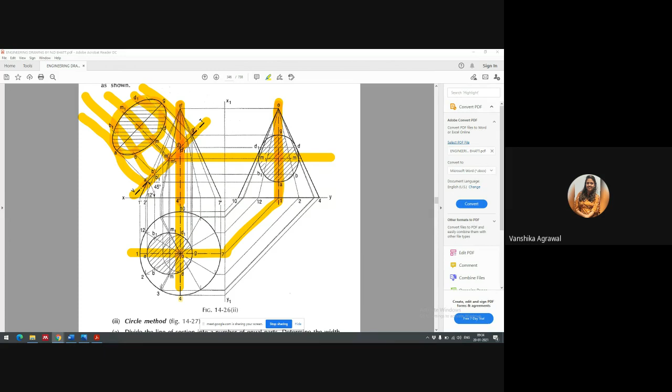एंड इन द सिमिलर वे O से B का जो डिस्टेंस है वो भी हमने मार्क कर लिया। आप देख रहे हैं, B1 यहां लिखा है और B यहां लिखा है, और same B यहां और B1 यहां लिखा है। तो इस O से B1 का जो डिस्टेंस है वो हमने निकाल लिया, and we put these cuts here।

इन द सिमिलर वे, M1, M2, ये M1 और M2 यहां लिखे हुए हैं, और ये points of M1 and M2 हैं। अब ये points same generator पे हैं। अब ये भी देखना होगा कि ये 3 वाली जो लाइन आ रही है, यही लाइन का जो जनरेटर है, ये जहां कट कर रहा है। समझ में आया ये पॉइंट, एंड इन द सिमिलर वे ये वाला जो जनरेटर है।

एंड देन दिस पॉइंट, जो पॉइंट G है उसके पहले ये वाले 2 पॉइंट्स हैं जो B1, B2 के पैरेलल पॉइंट्स हैं, विच आर D1 एंड D2, ये हमारे को यहां मिल गए। So that is how the true shape is what we get।

सर, इसमें जब हम लोग मेजर करके आर्क लगा रहे हैं तो वो मेरे मेजरमेंट्स जनरेटर्स पे नहीं कट कर रहे हैं। यस सर, यही प्रॉब्लम आ रही थी, मैं इसको ऐसे ही कर रहे थे पर वो जनरेटर्स पे कट ही नहीं कर रहे थे, तो मैंने सोचा हो सकता है मैं ही कुछ गलत कर रही हूँ।

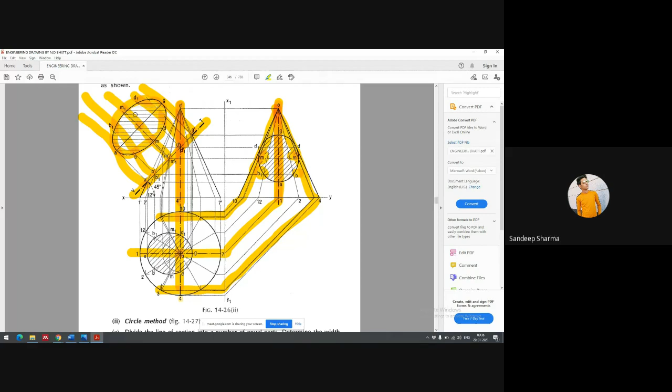बेटा एक बार, फिर मैं एक बार इसको खुद ड्राफ्ट करता हूँ एंड देन आई विल बी इन अ बेटर पोजीशन टू रिप्लाई टू योर क्वेरी।

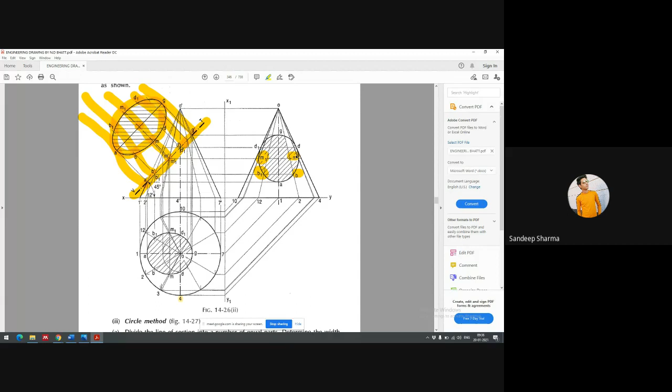समवन हु इज लिविंग क्लोज टू वैशाली नगर. यस सर. कहाँ रहता है भाई? सर पास में ही रहता हूँ, मतलब कमला नेहरू नगर साइड. अच्छा, कमला नेहरू नगर रहता है क्या? हाँ सर. चर्च के पास में? सर मी नो टू, सर. तो चर्च से थोड़ा सा दूर उससे. कमला नेहरू नगर कहाँ पे आया? सर ये बाईपास है ना, 200 फीट, हाँ. उससे थोड़ा सा आगे जाके वहां पे. अच्छा ठीक है. एनीवन एल्स? सर मी. कहाँ रहता है भाई? सर विवेक विहार मेट्रो स्टेशन के इधर. विवेक विहार मेट्रो स्टेशन, ठीक है. मैंने देखा था कोई अगर आसपास है तो अलग बात थी.

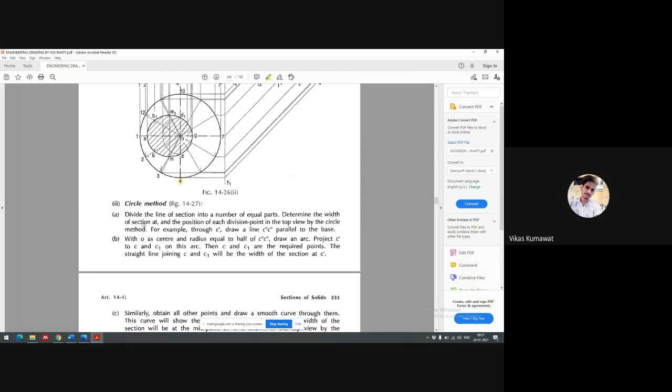चलो ठीक है, मैं अभी खुद ही ड्राफ्ट करता हूँ. I'll draft this and get back to you on this कि ये कैसे, क्या इसके अंदर इशू आ रहा है. I'll have to draft this on my board. So in the meanwhile, let's not put in time.

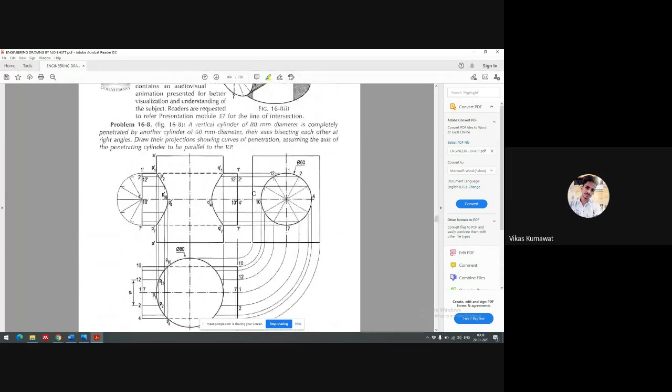So today what we will be doing, we will be learning intersection of solids. Now, intersection of solids is a little, I would say, a little tricky to understand.

Yeah, it is very easy. अगर एक बार समझ में आ गया ना तो it is a cakewalk. अगर नहीं समझ में आया ना तो वो तुम्हारे को दिक्कत करेगा. ठीक है. तो आई वुड सजेस्ट कि आप सब जने बहुत अटेंटिवली इसको देखिएगा.

सबसे पहले तो ये बताओ कि व्हाट डू यू अंडरस्टैंड बाय इंटरसेक्शन ऑफ सॉलिड. लोगों ने मतलब इंटरसेक्शन की बात करी हुई है.

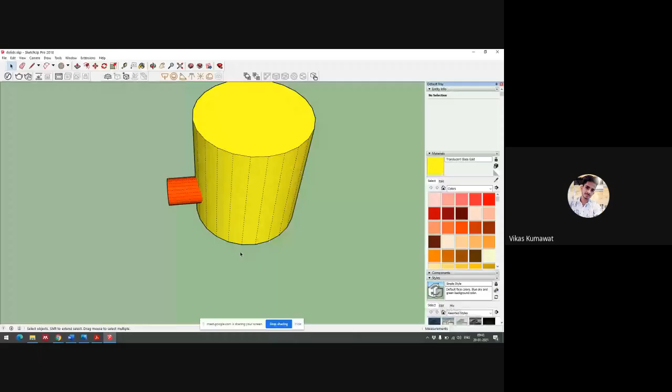Okay, so until now what we were looking at, everyone able to see my screen? Yes sir. Until now, what we were looking at were very simple geometries, geometrical figures, mainly working with surfaces and very basic shapes and forms.

So we break down almost every geometry that we have into very simpler forms, and those simpler forms, when they combine together, they make complicated buildings and complicated forms as we see them. What we see are these complicated forms or complicated buildings. No building, whichever way we look at it, whichever way we make it, can be made out of a single form.

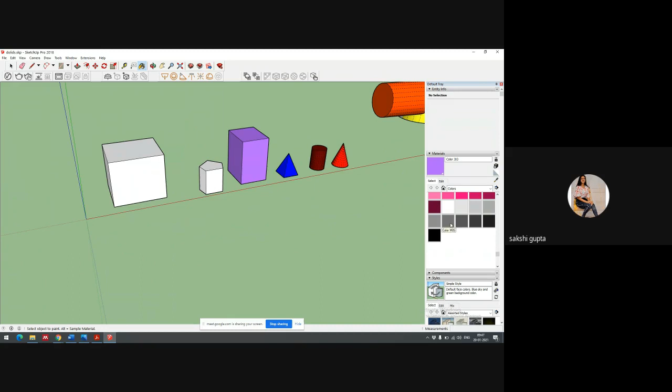So if I'm taking these shapes as is, it doesn't really correspond what shape this is, or what color this is, or what these objects are - some very basic coloring, so that when these forms intersect, you guys are able to differentiate among them.

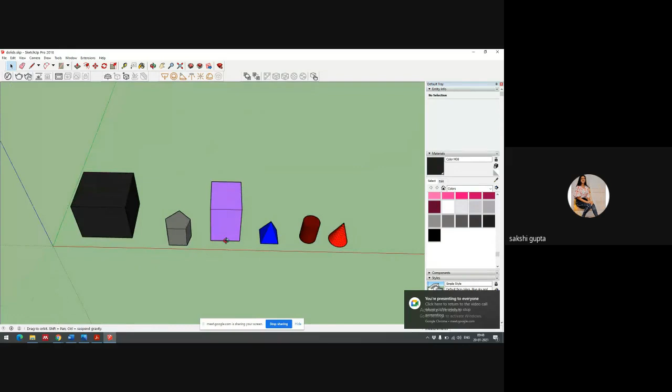Okay, so now these are some of the basic forms that we have, and now what we need to understand is ki agar koi bhi do forms intersect karein, making them equally sized, that jab hum intersect karein to woh aisa na lage ki ek doosre ke andar merge hi ho gaye.

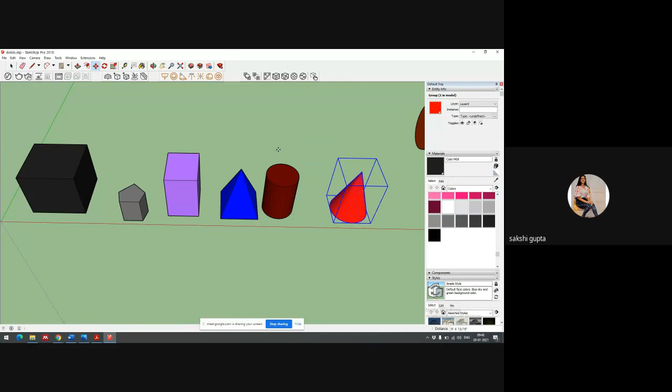Now let's say yeh ek cube hai, main usko copy karta hoon. Individually baat karenge - pehle humne baat ki ek cube and cube ki. Ab aisa to nahi hota na ki ek building jo hai woh ek single cube ki tarah hai, but it can be a combination of these two cubes. So let's say I just change the color of this one cube to purple, so that it is very contrasting and you are able to see it.

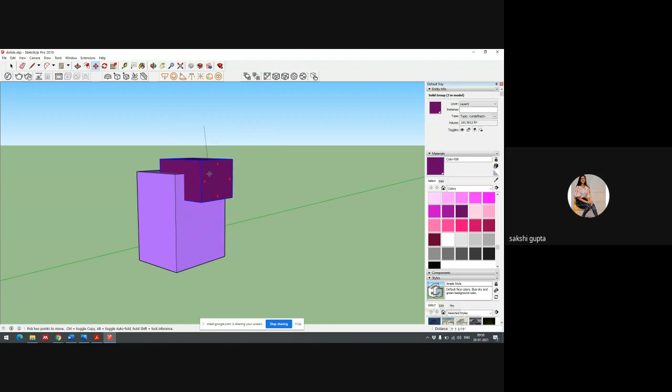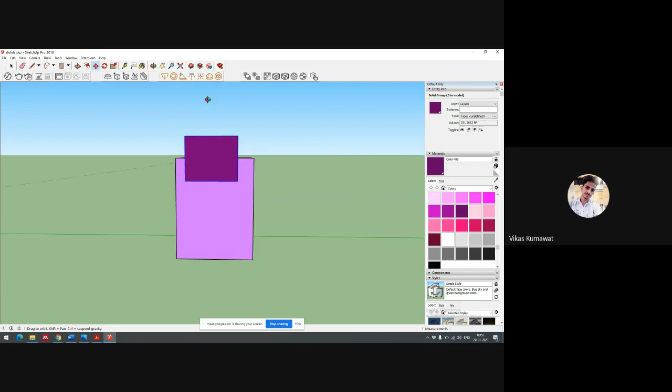Yes sir. Now when I am looking at it from the front, let's say I freezed this here. When I'm looking at it from the front, I do not see this entire cube - the dark purple colored cube - but I'm able to see this light cube when looking from the front. But when I'm looking from the right, what do I see? I do not see the main figure as complete, but I'm able to see the top figure which is complete. But what if I look at it in the plan - top view?

It is almost forming a T sort of a shape. And my rear view or back view is going to be the mirror of my front view. Agar front mein yeh object right mein nikal raha tha, to back mein yeh wala object left mein nikalega, right? And if I'm looking at it from the side, my side view is going to be only this. So that is what we have to be seeing.

The story starts to get complicated when I say that this object is tilted.

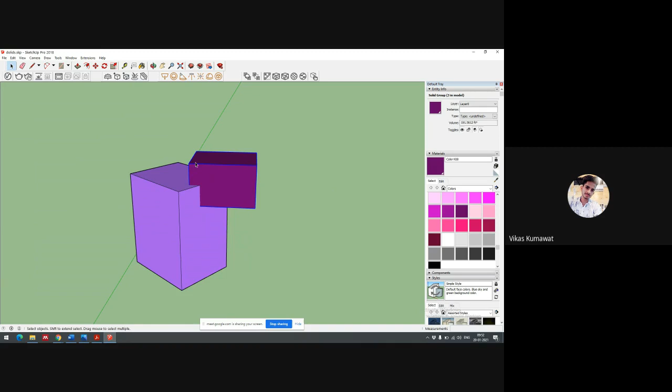Now let's say I tilt this to 45 degrees without tilting the dark one. Now the story starts to get a little complicated, because I've tilted this at 45 degrees and this is still lying where it is. Now you're seeing how these projections are being seen. So what is the change in plan that it is getting? It is a change in side elevation or the front elevation.

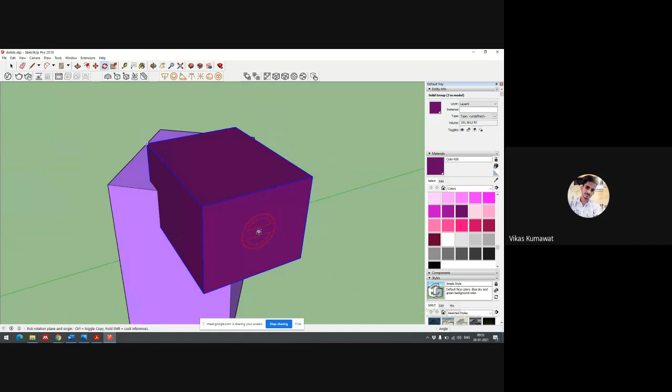Yes sir. Then the story gets more complicated if I somehow tilt this also at 45 degrees, and maybe I'll move it a little down.

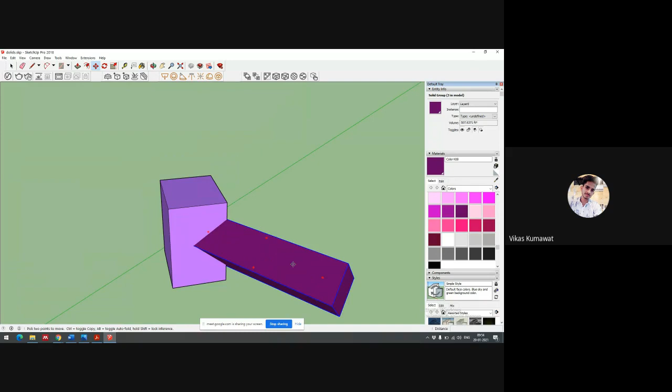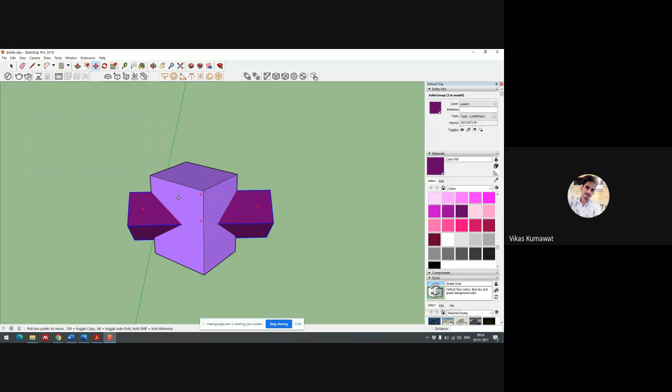And let's say I make its axis meet. It hasn't tilted to exact 45 degrees from me, I mean no, sorry, it's a rectangle, sorry, this rectangular shape has been formed, that's why it looks like this. But what I can additionally do is stretch it, like in old movies when a sword used to come out. So this is a sort of shape or form I'll get when it is an intersection of a cube and a cuboid, and a cuboid perpendicular to each other, so their axes are forming a plus. That is how this thing works.

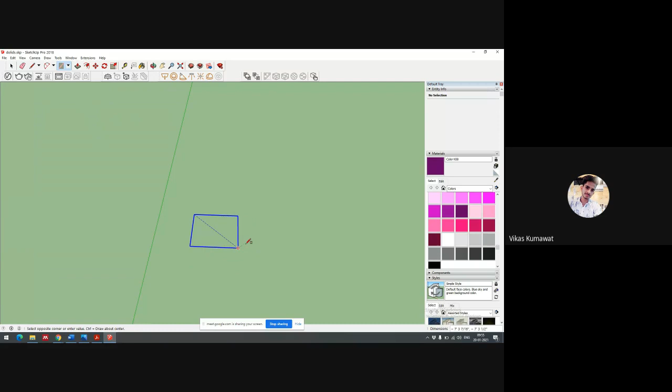Now I want all of you to be looking at your first question. The first question says it is a square prism of base side 50 mm. I'll draw this as we go ahead. So it is a square base prism of side 50 mm resting on its base in HP and completely penetrated by another square prism of base side 40 mm.

So this is a 50 mm one, let's say, axis is - no, axis is not given. The prism of base side 50 mm is resting on its base in HP and is completely penetrated by another prism of base side 40 mm such that the axes of both prisms intersect each other at right angle. The faces of both the prisms are equally inclined to VP.

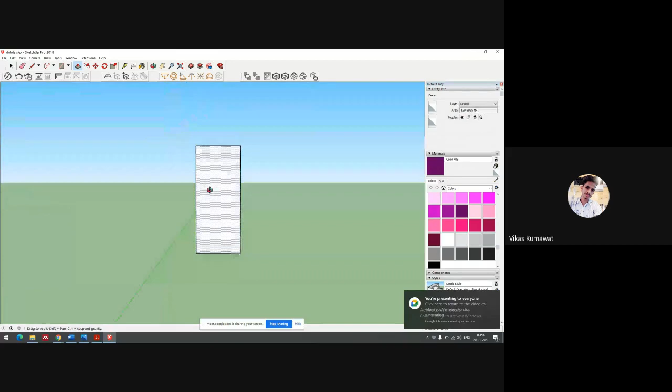Now when can faces be equally inclined to VP, for both? So my VP, my vertical plane, is at the back, and my horizontal plane is here. Vertical plane is at the back, my horizontal plane is in the plan.

Now if this has to be inclined, the first thing the question says is that there are two of this type. So let's say I make you a group - there are two of the same type. The second one is a little smaller than the first. Let's say I made it a little smaller than the first.

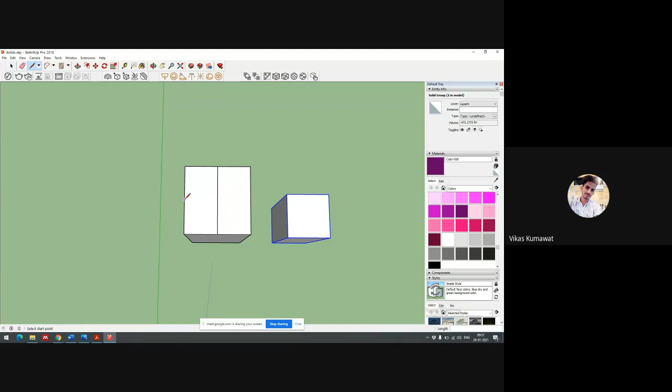Now it says both of them, both the axes. So the way to find the axis is that the centers of these form the axis. If I draw a line in the center of this, that is going to give me an axis. This is going to be an axis, and this is also going to be an axis, like a line which is in the center of it.

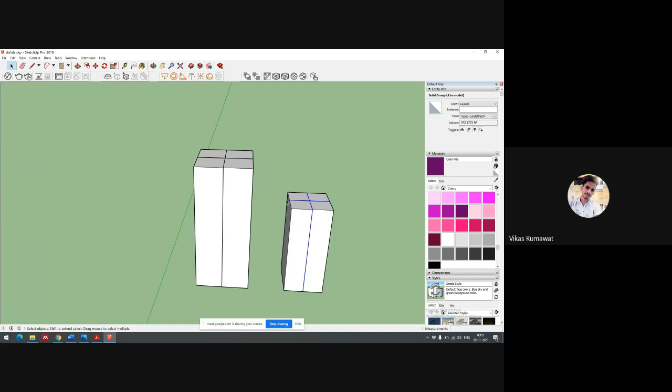Yes, now sir, the question reads - yes, the question reads that both axes are perpendicular to each other. So for making them perpendicular to each other, what I'll have to do is this. Now these will be perpendicular to each other, the axes. And the question also reads it is not just perpendicular.

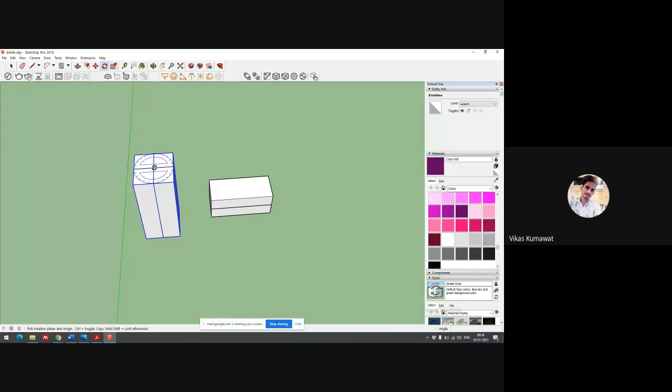45 degrees, and I will have to also tilt this at 45 degrees. So now both the axes are perpendicular to each other, and for both the objects, the surface is making an angle of 45 degrees, right?

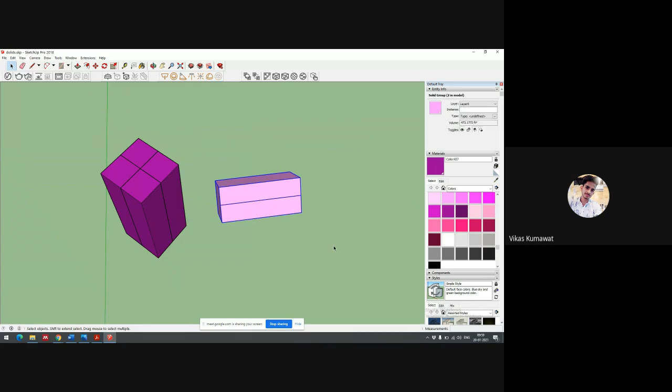So now the question also says it is completely penetrated by this. So if I put that inside of each other, that is something that I'll get. Something like this will happen if this goes into complete penetration. Yes sir.

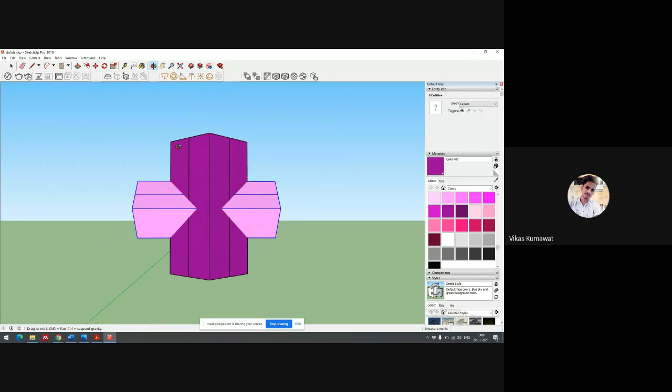Obviously these are generator lines, so you'll not be able to see these lines, they hold no value here. Once the generators are formed, these lines have no use. These lines will not come dark, they will come light.

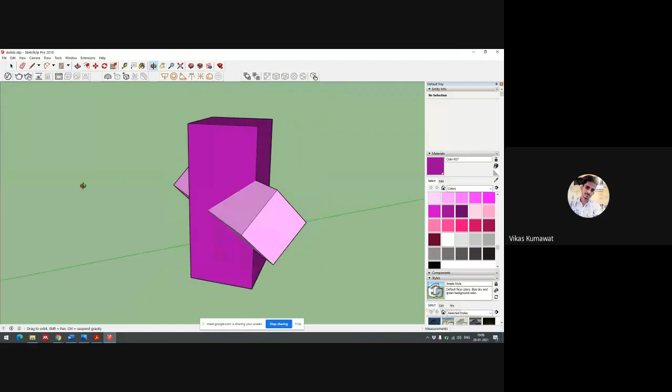Now when you are looking at the object, you can see, this is the side. That is exactly what we are getting. And this is the top.

This is what we are getting as top view. Does this question make sense to everyone? Yes, sir. Okay, so this is the question number 1 that you have to do.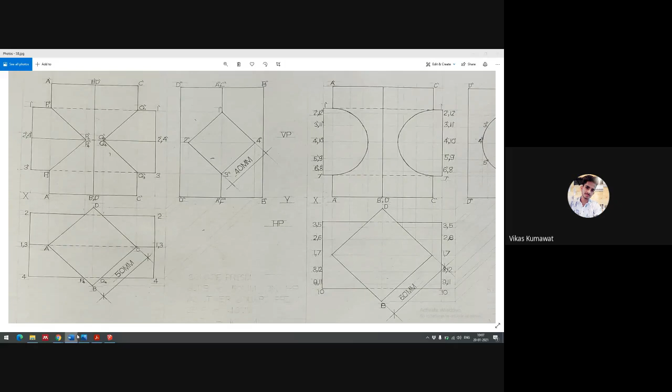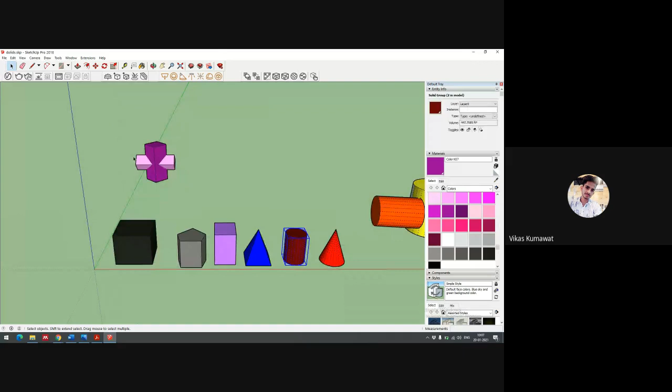Now the method for this question will become clear - how is the intersection working, how are we doing the intersection of any object. Now it is not only that the intersection can happen in terms of very clean and square surfaces. This can even happen for very complicated surfaces like a cylinder, like a sphere, like something else.

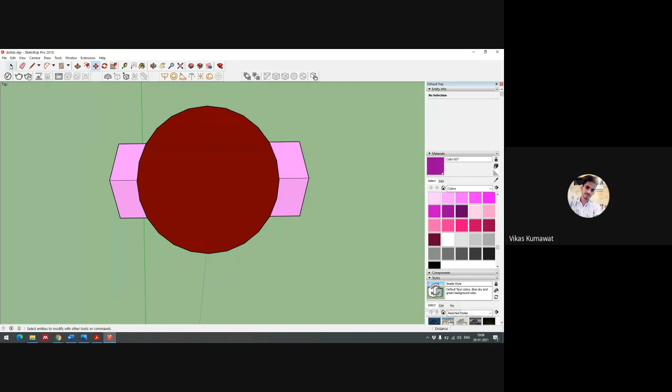So if I place a cylinder in place of this object, I keep that same object there. I just take this cylinder and try to put it there. If this is the cylinder, in its plan at the same position I have placed the cylinder, meaning I have not changed the position at all. What I've just done is instead of using the square prism, I have now used a cylinder.

So now you are able to see what changed. Earlier we were getting very rigid lines, and instead of rigid lines, now we are getting a curve. You are able to see this curve, you are able to appreciate the curve that we are getting.

And this curve we are not getting in side elevation - in side elevation only that line is visible. But when we look at the front view, we are getting this as a curve. I'll just scale this down a little so that you're able to appreciate the curve a little more.

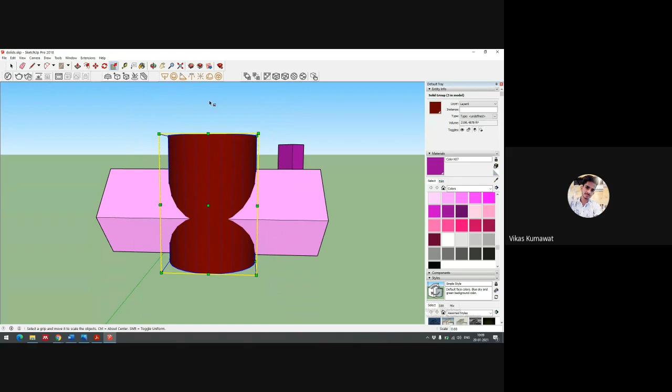Is the curve visible? You're able to see this curve, make this curve out. And even when you're looking at the plan, you are not able to see how this penetration happened. But only when you are looking at the front of this intersection, that is when you are able to appreciate how this curve is going in. And the points we get here have to be raised from the generator.

And let's just go ahead with question number 2. Then we'll understand this a little better in detail - how do we draw this and how do we go about this?

Okay, now question number 2. Square base prism of base side 60 mm is resting on its base in HP, which is horizontal plane, with a face inclined to 45 degrees to VP, which is vertical plane. So that means our older object - this object here - is placed almost in this same way, because it is making 45 degree angle with VP. The question says that it is making a 45 degree angle with VP, and that is how we have kept it.

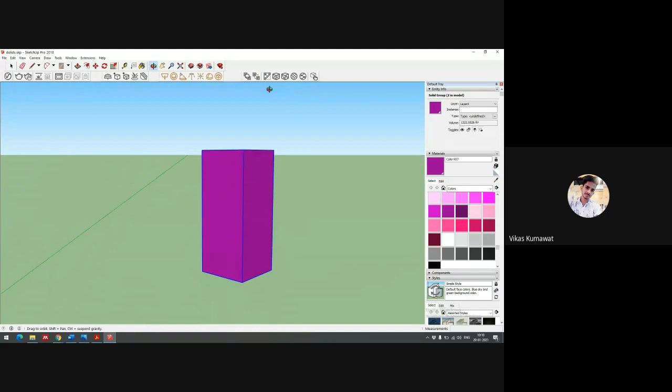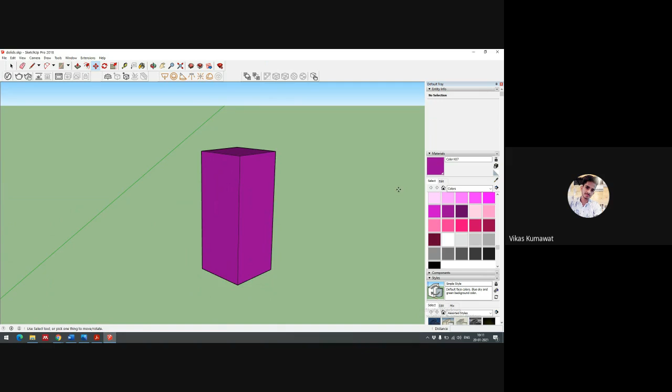Is completely penetrated by a horizontal cylinder of base diameter 60 mm, such that axis of prism and cylinder intersect each other at right angle. That means earlier what we were seeing, there a cylinder was bisected by a square prism.

Instead, what is happening is that this square prism is intersected by the cylinder. And how is that intersected? For this intersection, the question says that it is at 90 degree angle, because the axes are perpendicular to each other.

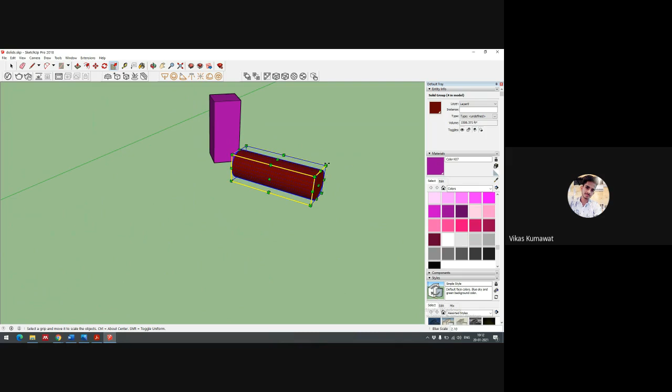So what I am doing is, because the axes are perpendicular to each other - let's say this, I increase the size of the cylinder a little and reduce this a little so that this is there. And now I take its generator and hold it here, and I keep it here. So both of their axes, meaning its central axis and this axis, both become in line.

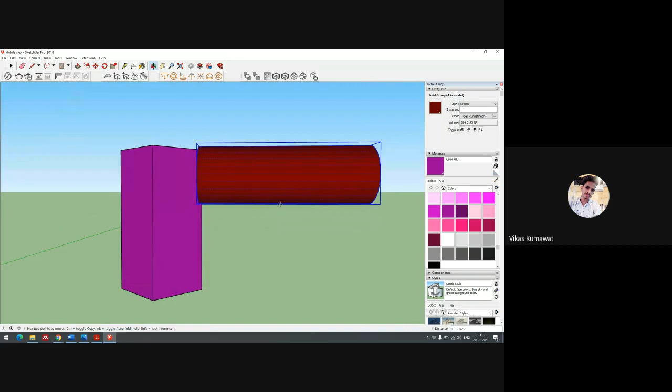They are both perpendicular to each other, but it says that they are meeting in the center - intersect each other at right angle. So what I'll have to do is move this object towards the center and penetrate this object.

So this is what I will see. When I'm looking at the side elevation, I will see a circle and the object making a rectangle with a line in center. This is what is going to be my front - rather, we'll come back to the front later. Then this is what is going to happen in my plan.

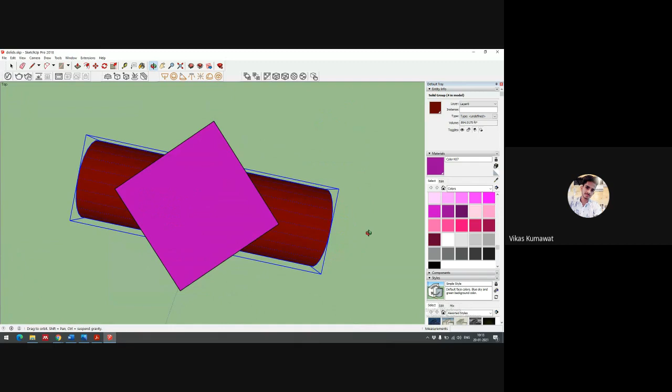And this is what I'm going to see when I see it in elevation. So now, with the help of my side elevation and my generators from the top elevation, I can connect these points. Can everyone see these dotted lines?

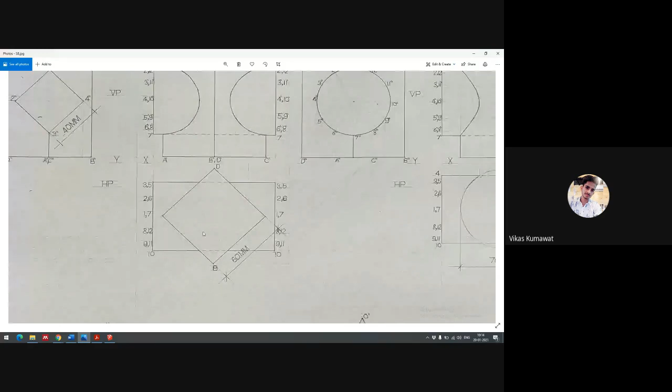These are basically the generators. And now when I see these generators, I'll come to that in a moment. Let me just show you how this is to be done. So now, you're seeing this. Is this one visible clearly to everyone?

Now in this, the square prism is kept on ground, which is A, B, C and D. You're only able to see the point D and B mentioned here, but this is A, B, C and D, right? And the projections that have been made are A dash, B, D, B dash, D dash, C and C dash. That is how this prism is made.

And when we look at the side elevation of this prism, it has point D taking its projection going up, D and D dash, point B taking its projection, B, B dash, and this point has it at A and C. So A dash, C, C dash.

That's what we have. Now the question says that the axes of this are perpendicular. So perpendicular axes can be drawn, one axis here and another axis here. So using this center of the axis, we draw a circle because in the side elevation we could see that circle like this, right? So that is what has been done.

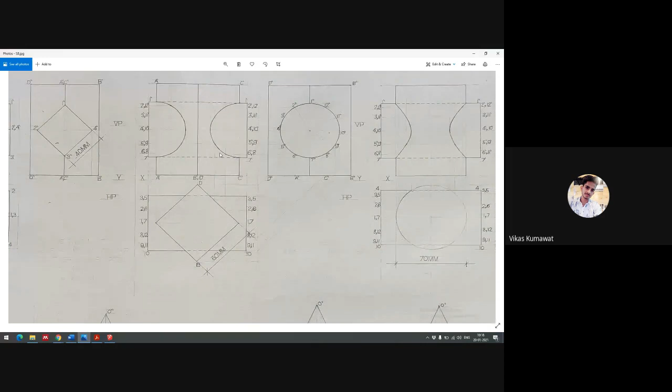Point 3.5, and similarly we'll take all the other points and we'll be able to draw this curve. This is what our final object is going to look like. So we'll have to draw the front elevation towards the end, and that will be done through projections which are coming from the top view and the side view.

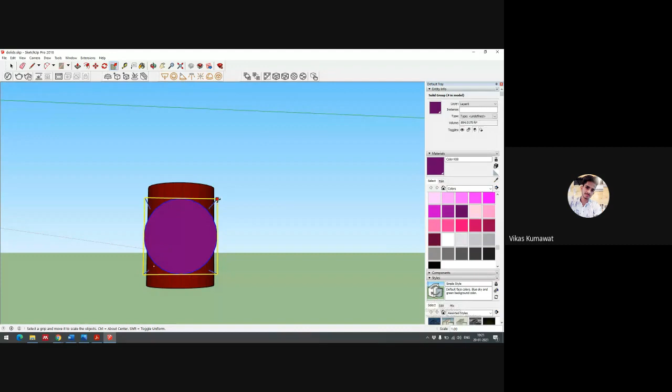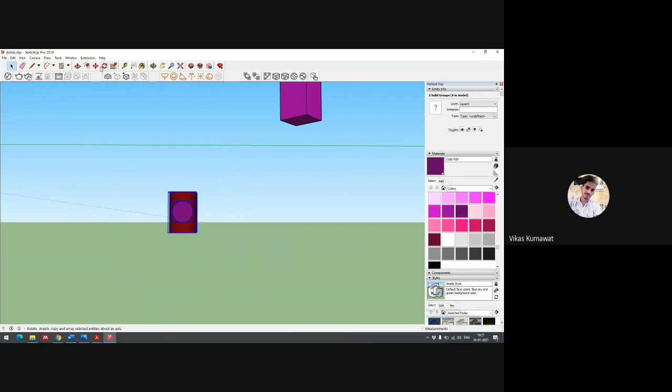अभी तक हमने जो क्वेश्चन किए उसके अंदर ये ऑब्जेक्ट जो थे, ये इनकी एक्सेस सेंटर के अंदर ही मैच कर रही थी। राइट, सबकी एक्सेस जो थी वो सेंटर में मैच कर रही थी।

ऐसा भी तो हो सकता है कि इंस्टेड ऑफ मैचिंग दिस द सेंटर, ये ऑब्जेक्ट कुछ ऐसे हो। ये चेंजेस दिखा? ऑलवेज इंटरसेक्ट एट द सेंटर ना? दिखा?

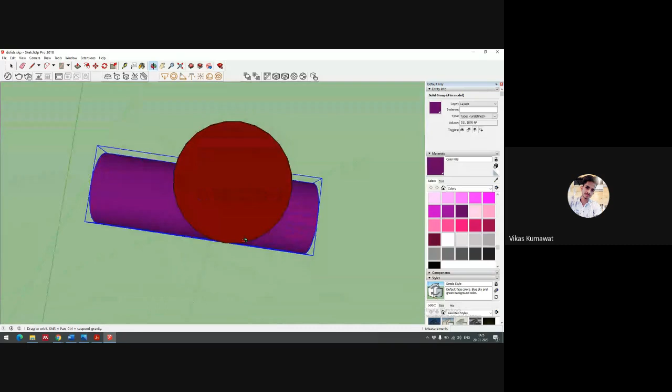Hello. You're able to appreciate how this change, how the location of this, how the location of axis when changes, how the resultant figure is going to change, both in side elevation, in top view, and in front view as well. That is what we have to be seeing, that is what we have to be looking at.

जो हम ये ऑब्जेक्ट्स देख रहे हैं और जो हमारा थर्ड क्वेश्चन है वो क्या कहता है? थर्ड क्वेश्चन है हमारा, वो ये कहता है सिलेंडर ऑफ बेस डायमीटर 70 mm, height 100 mm। Let's say the red one is 70 mm and height is 100 mm, resting on its base on HP। It is penetrated by another cylinder of base diameter 60 mm, a reduced diameter for the penetrating cylinder, and height of 100 mm, such that their axes intersect each other at right angle। Draw the projection and show the curves of intersection। So what we have to show is curves of intersection।

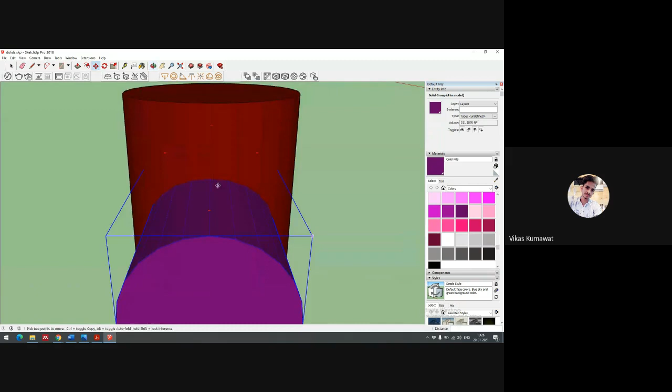Now this question does not say that it is penetrating at some angle or distance, so we can easily assume that it is penetrating at the center। So we are making them meet here, so the axes are aligned, and that is how we need to resolve this।

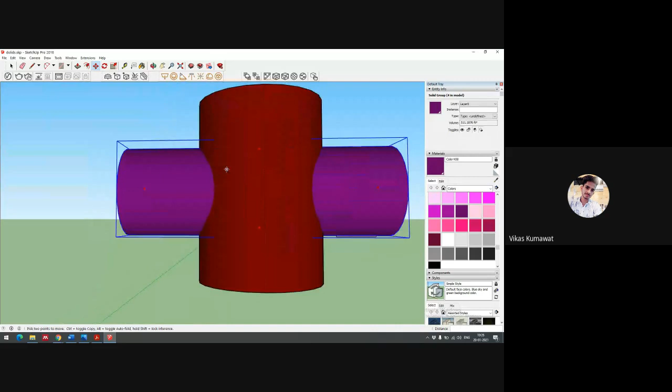अभी जो हमने same projections, एक जब हम स्क्वायर प्रिज्म में उठा रहे थे तो हमारे को 4 प्रोजेक्शन से काम चल रहा था। अब जब हमारा नंबर ऑफ प्रोजेक्शंस बढ़ गया है, उसकी वजह से हमारा ये जो नीचे वाला ऑब्जेक्ट है उसके भी 12 प्रोजेक्शंस उठेंगे, और साइड वाला जो ऑब्जेक्ट है उसके भी 12 प्रोजेक्शन उठेंगे, और जो बॉटम वाला सिलेंडर है जो प्लान में दिख रहा है, उसके भी प्रोजेक्शंस उठेंगे।

And both the projections जब हम इन्हें मीट कर रहे हैं, प्रोबेबली इसके अंदर कंफ्यूजन बहुत ज्यादा हो जाएगा, तो इसलिए इट इज एडवाइज्ड कि एक की तो नंबरिंग करें 1 2 3 4 5 6 7 8 9 10 11 12, और दूसरे वाले का आप नॉमेनक्लेचर करें A B C D E F G H I J K L, राइट? तो इससे होगा ये कि यू विल बी एबल टू सी हाउ द इंटरसेक्शन ऑफ 7J वर्क्स, how the intersection of the two is working to give you this curve very easily।

बॉटम के भी 12 प्रोजेक्शंस आएंगे, वो हम प्रोजेक्शंस ऊपर लेंगे, तो यहाँ के 12 प्रोजेक्शंस आएंगे वो हम साइड में लेंगे, और यहाँ कहीं हमारे को ये इंटरसेक्शन पॉइंट्स मिलेंगे इस कर्व पे, विल टेक देम अप, एंड intersection point of these will give us the...

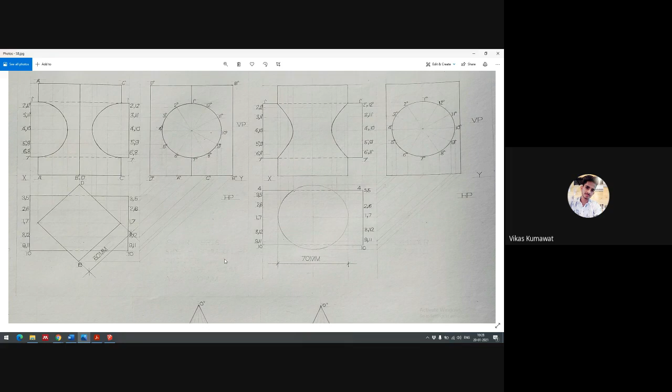ये चीज समझ में आई? ये चीज क्लियर हुई सबको? हेलो, ऑडिबल? एम आई नॉट ऑडिबल? Yes, sir।

ये चीज समझ में आई सबको कि इंटरसेक्शन कैसे काम कर रहा है? आई थिंक ये वाला हिस्सा बच्चों को समझ में नहीं आया, तो व्हाट वी कैन डू, वी कैन शो इट इन द ग्राफ पेपर और समथिंग। मेरे को लग रहा है कि ये बच्चे समझ नहीं पाए ये वाला हिस्सा। अच्छा मैम, मैं अभी एक मिनट ग्राफ पेपर में बना लेते हैं, कोई इशू नहीं है।

Are you getting it, guys? You should be honest, because अगर अभी समझ में नहीं आ रहा है तो you will not be able to draft it।

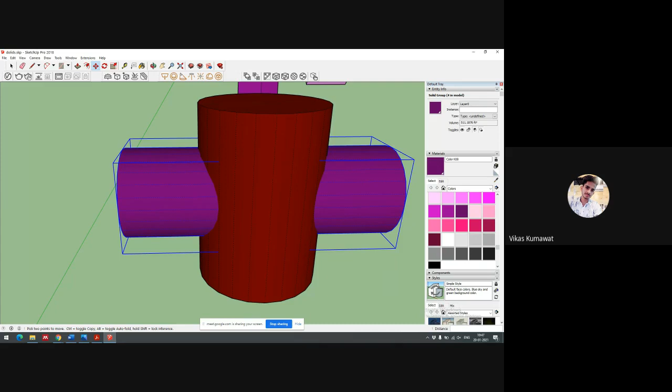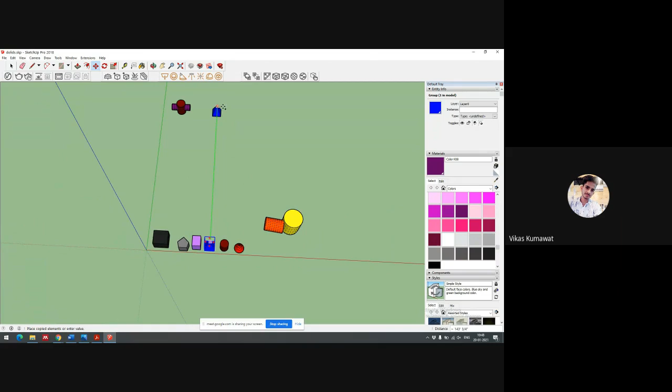If let's say this is our vertical plane at the back, are the sides making equal angle to VP? Hello, I'm asking something. Yes, sir. Is this side currently at equal angle?

If let's say this is VP, if let's say this is my vertical plane at the back, are the sides of this pyramid making equal angle to VP at the moment? Yes, sir.

Am I audible? Am I not audible? Yes sir, audible, sir audible. Oh shit, sorry, I had not unmuted.

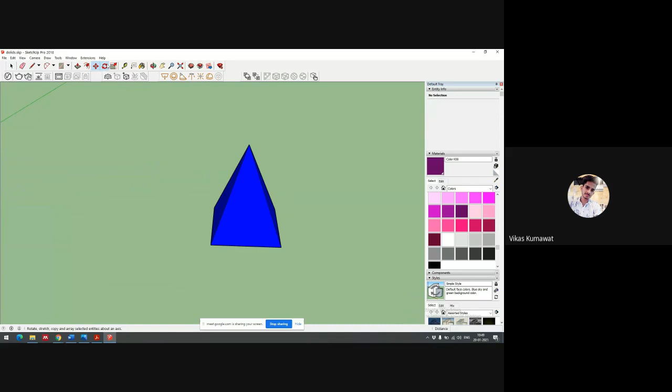Okay, so now when they are making equal angle to this VP, to make this at equal angle, we'll have to put this at 45 degrees. So we...

To bring this to 45 degrees we need some adjustment. This has come to 45 degrees. Now the sides are making equal angle to VP, right?

The question further reads: a square inclined to VP, a square prism of base side 30 mm having its axis parallel to both principal planes.

Now read it very carefully. A square prism of base side 30 mm having its axis parallel to both principal planes. That means something which is parallel to both VP and HP.

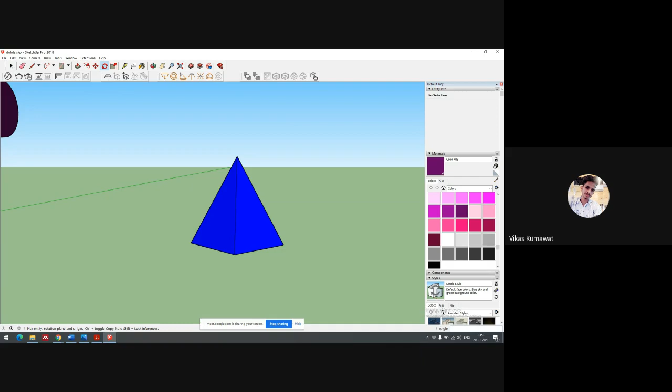That means if this is my HP and this is my VP, the object is lying parallel in this axis. So if I take this object, my HP is below and my VP is above, and this object - oh I deleted it, sorry.

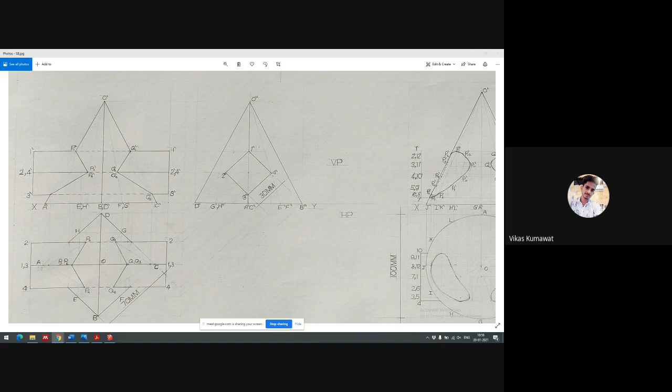Hello, am I audible now? Yes, sir. So I have moved to a different screen and I've stopped presenting from there.

Audible, visible? Yeah, Ankit.

Okay, so now the question is: a square base pyramid of side 70 mm and axis 100 mm is resting on, being equally inclined to VP. So that means this axis equally inclined means a pyramid whose side is 70 mm. When I take the projections on the side, so that's what I get. And when I take the top projections of this, this is what I am getting. So my object will look like this.

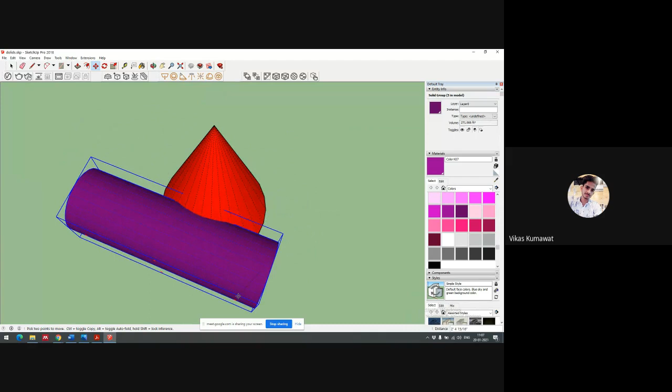See how the curves are changing. As the position of the object changes, the curves also get changed, right?

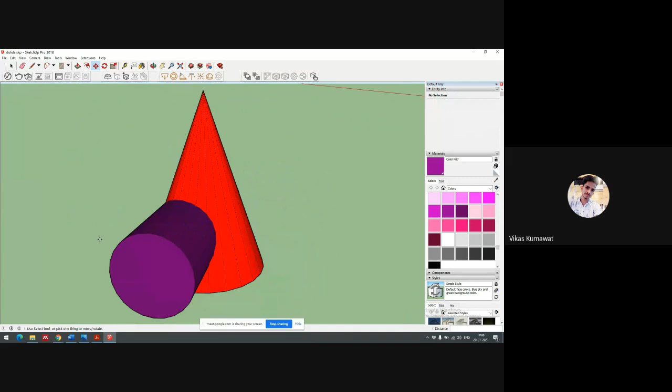So that is also something which is there, and it can apply to intersection of any object. You just have to be very cautious when drawing your building forms and your architectural drawings, about how objects are placed and how they intersect at an angle. Right now these are all on simple plain angles.